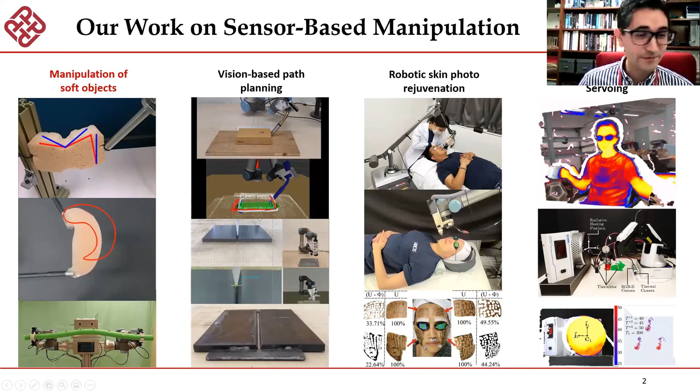The presentation I'm giving is mostly the work I've been doing with my group for the past 5 to 6 years. I mostly work on manipulation, sensor-based manipulation. For some reason, I'm only asked to talk about manipulation of soft objects. Probably in a few years I hope I can be asked to share my work in other areas. But in this talk, I will share the great majority of the work we have related to soft-object manipulation.

As I and all the others presenting today know, we all claim and make strong emphasis on the necessity to study this problem. More than the necessity, my intention with this slide is to ask: what is the difficulty? With about 50 speakers here, someone who hasn't worked on this problem before may wonder, is there any significant difference in manipulating something that is rigid versus something that is soft?

With rigid objects, we have basically many objects studied already. For soft objects, I was thinking this morning, is it fair to say that the great majority of objects we have in common environments are non-rigid? I don't know — probably worth discussion if someone wants to elaborate. But what they represent is the great majority of a capability we want robots to be able to autonomously perform: the manipulation of these materials.

The difference between manipulating these two, whether with a robotic hand or several manipulators, is that for a rigid object, its configuration, its feedback representation, is fixed. So let's go technical: we have at most 6 degrees of freedom — 3 of position, 3 of orientation.

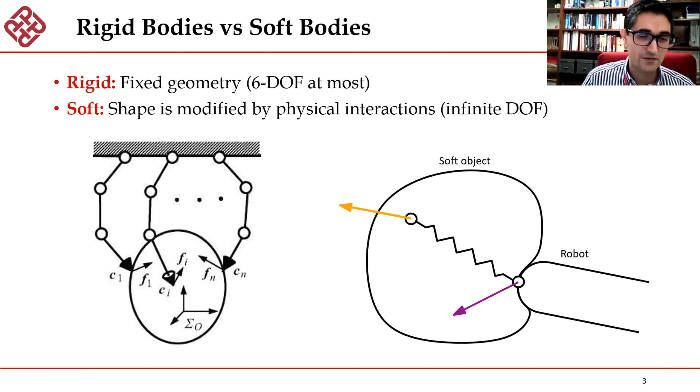Soft-object manipulation is the fashionable topic nowadays, isn't it? We have a new review every 6 months. We have special issues, we have workshops, probably in a few months a podcast about this topic. There's a lot of people working on this, and don't see this as criticism — I'm pointing this out to highlight the importance of this area, because providing manipulation of deformable objects capabilities to a machine really has many applications. I don't want to spend too much time motivating why this is important, because being here and giving a talk in a workshop should already make that necessity implicit.

So the work I'm showing today is about a problem that I call—I don't know if I can even say this has entered the state of the art—can we use the term shape servoing? I don't know, but at least that's the term I'm using.

In terms of areas, there's a field called visual servoing, where you have a camera and a manipulator, and you generally regulate some features to minimize an error.

Shape servoing is the natural extension to that problem. It's a control problem, but instead of controlling a feature like, say, a square observed with a camera, we're trying to characterize and deform the shape or configuration of a manipulated material.

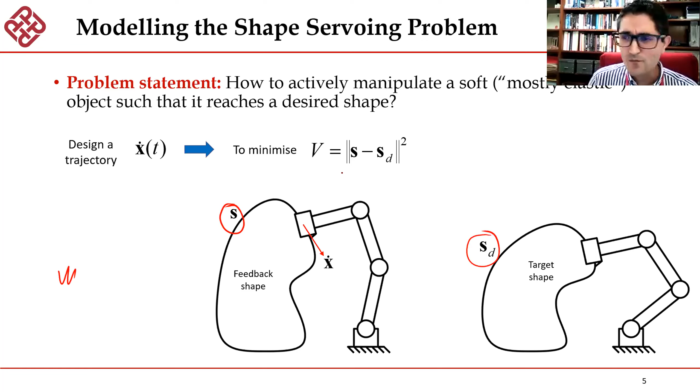There's a question here—let me move this one. Yeah, so this is the main topic I'm presenting today: how should we represent such a feedback configuration of the object?

As I mentioned, soft bodies, from a materials point of view, have infinite dimensional degrees of freedom. So when we model this manipulation problem as a control problem, we need to compute the feedback shape of an object. One of the questions we can start asking is how accurate or detailed such a representation needs to be. This is a crucial factor, because the level of detail determines the size or dimension of the representation.

There are many ways to do it. I don't think there's a unique way, and this is an actively studied problem in this field.

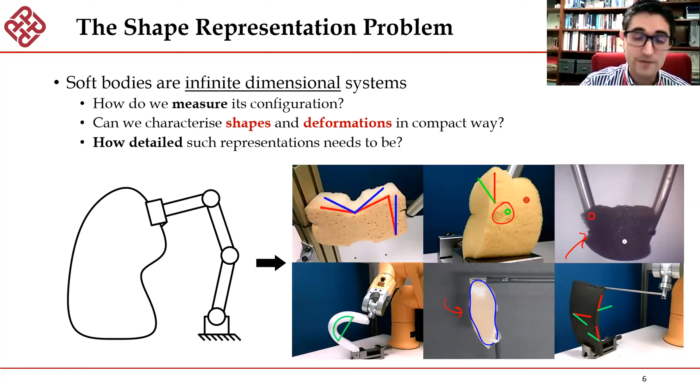These are screenshots from papers and experiments we've done through the years. We can represent shape with angles, as we'll show later in some experiments. We can represent them with simple points, such as this one. We can represent them with contours, or with points in 3D. Anyway, there are really many ways you can do it.

Now I want to draw attention to an important issue. From the experience we've acquired, there's an approach I call here the naive approach to shape servoing. Again, this is a control problem.

I want to emphasize that simulation—numerical simulation, virtual reality simulation, finite element model simulation—has objectives that are different, or generally different, from those of control. So we cannot equate simulation to control.

For example, we may be able to manipulate something in 3D to observe—let's say we're observing a foam sheet with a point cloud sensor. These are some typical shapes, surfaces we might compute. Let's assume this is what we want: we want the robot to deform this one into this one. So the question this talk tries to pose and partly solve is: how should we characterize the shape of this object so we can use it in a control scheme?

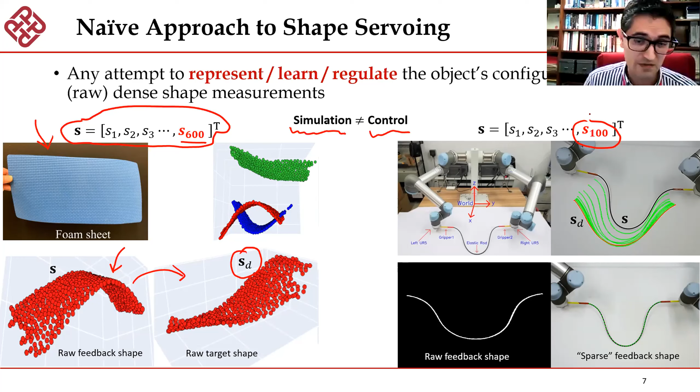So if we represent it as a series of steps, I'm deliberately using the word latent, because although in the field one may associate latent almost exclusively with a network, we can generalize this concept as a non-evident way to represent the configuration of a soft object. So I'm calling this a shape encoding algorithm or method that will extract a series of numbers that can fairly characterize, maybe even almost locally, quite globally, the configuration of this object.

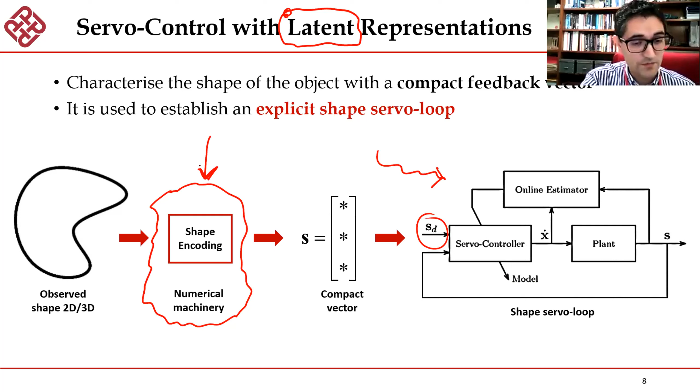So our interest in this talk is to find different ways to compute this, and how we use it in this very standard feedback control problem. We have some plant, we can feed the shape back, and we can define some target. So we'll give you some examples of the work we've been doing specifically on this.

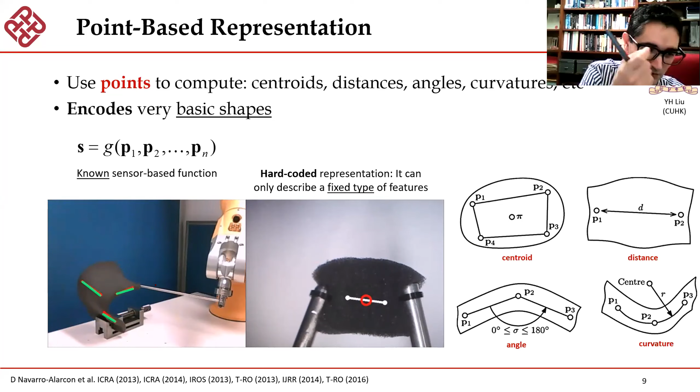Okay, so what I'd call the trivial solution is if we can use some specific geometric features to compute centroids, angles, distances, curvatures, and their combinations. So any geometric function based on some point features you may detect on the surface of your object. We can use such functions, say a centroid or an angle, to characterize the observable configuration of this object.

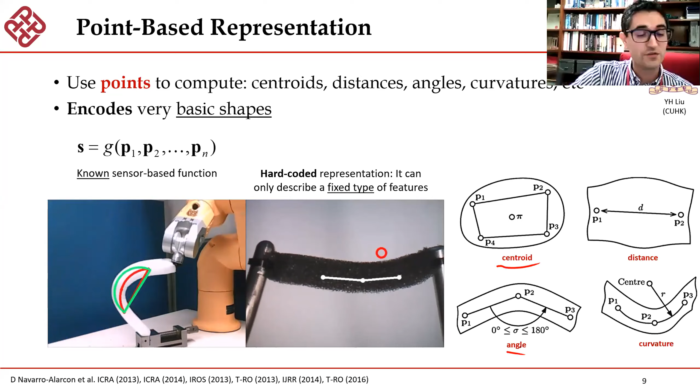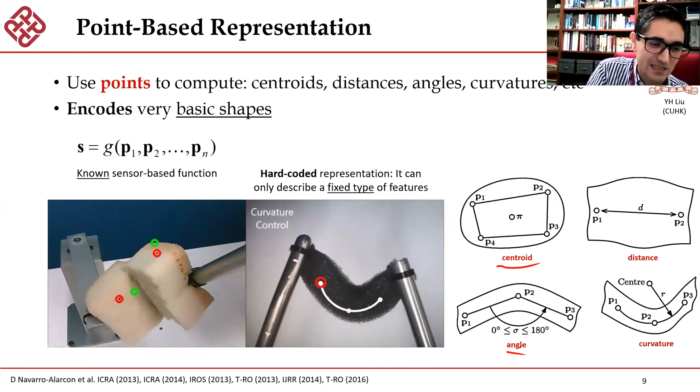We did this in probably too many papers. I'd call it the very trivial approach, because it's the direct extension of what one from the visual servoing community would do. It's really the natural way you end up doing it, because it's the easiest way to do it and closely resembles the visual servoing problem.

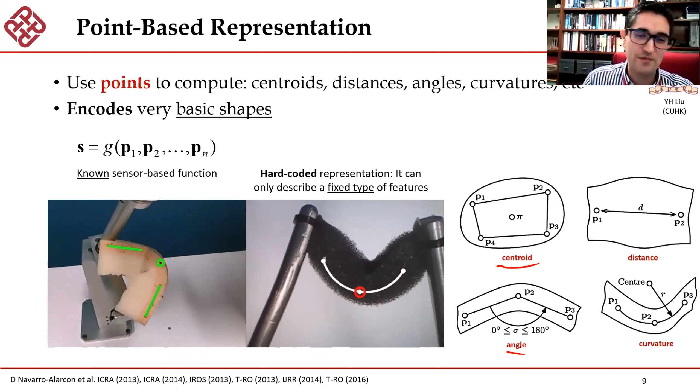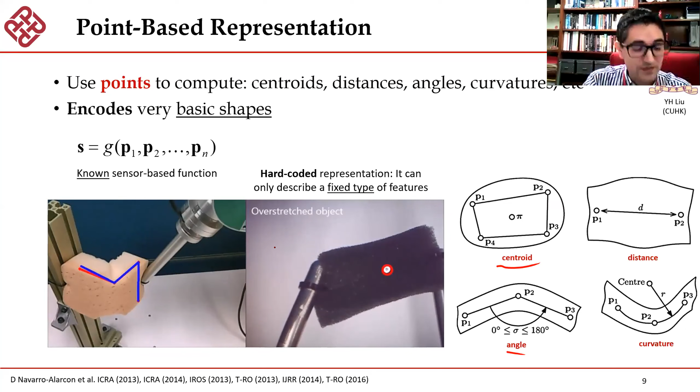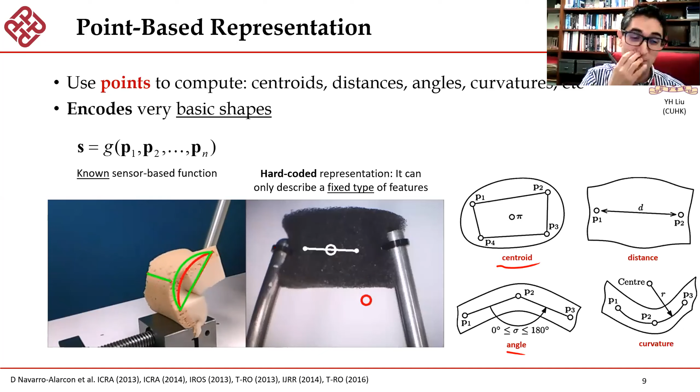But it has some issues. The type of shapes or configurations you can encode using hard-coded geometric features are very basic, very limited. And once you define it as such, you cannot morph them into something else. Once you've coded curvatures and want to do something else, that's it - your function cannot change. And that brings several limitations to the problem.

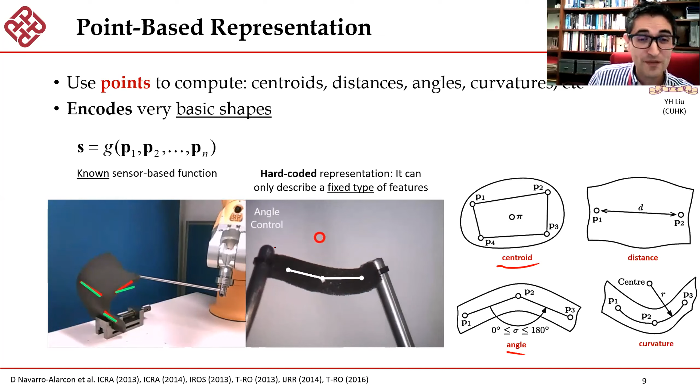So we can, of course, define more general approaches that are not as specific to some geometry. Let's say, for example, bending - that's very clear practically: once you've coded bending, you can't really do stretching somehow. So we started studying more general approaches to represent, in this case, contours.

So we use, again, a very standard way to do it - we use Fourier series, a finite number Fourier series, to approximate the observable contour of an object. The reason we did this is, from a control background, we can then use very well-known tricks that we use everywhere. We can split such approximation based on a known regression matrix that you can measure based on sensor feedback, and then you have a vector, which are the so-called Fourier coefficients.

It turns out these coefficients - that's our proposition here - we use as, let's call it, a proxy to shape. It's not shape per se, but they can encode a shape you're observing with your camera with a locally unique set of vectors. I highlight this has to do with using finite Fourier series, because we know from theory that infinite Fourier series will exactly approximate everything, but will give you a gigantic vector of coefficients.

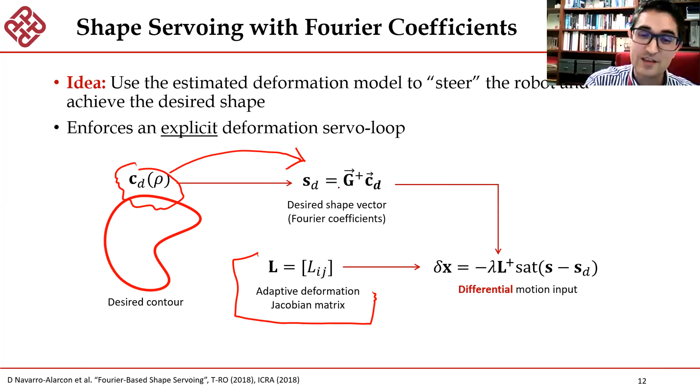First of all, you have a contour, a desired contour, you project it into Fourier coefficients, desired Fourier coefficients, and then you project this differential, which is actually a differential in shape space, into robot motions. That's what we generally do with sensor-based control.

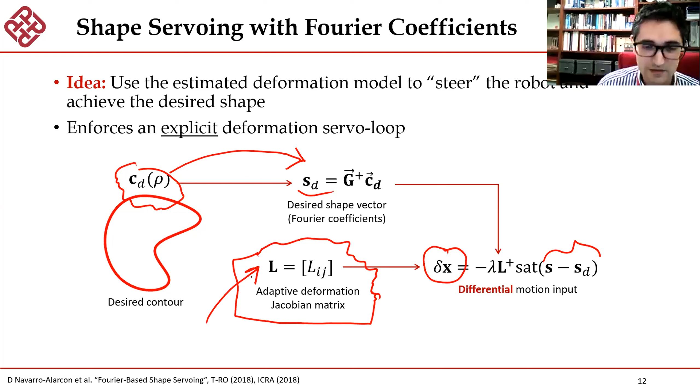Key here, as someone may wonder, is how do you compute the Jacobian matrix? There are so many recipes, and I literally call it that, recipe, because you just use it to estimate a Jacobian matrix. So let's see some results.

Here we're using 2D motions, and the sensor also gives us 2D shapes. What we are doing is encoding a high-dimensional observable shape from an object with just a few parameters, in this case depending on the number of harmonics.

I don't remember, I think in this experiment I used 3 to 4 harmonics, less than 20 parameters, so it's not so detailed.

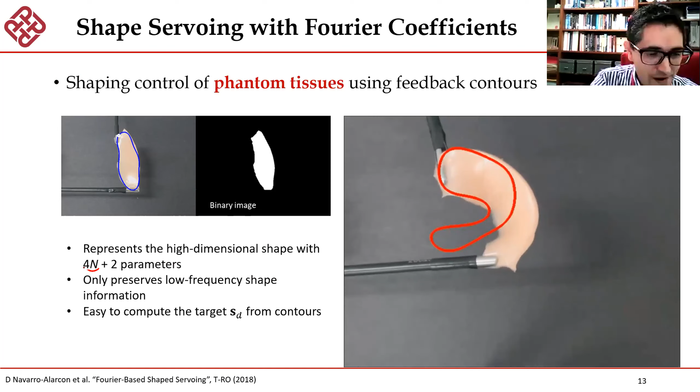As you can see, what we do is remove all the high frequency information, all the little details, which even if you have them, that's a question, does it help from a control point of view? What would you do?

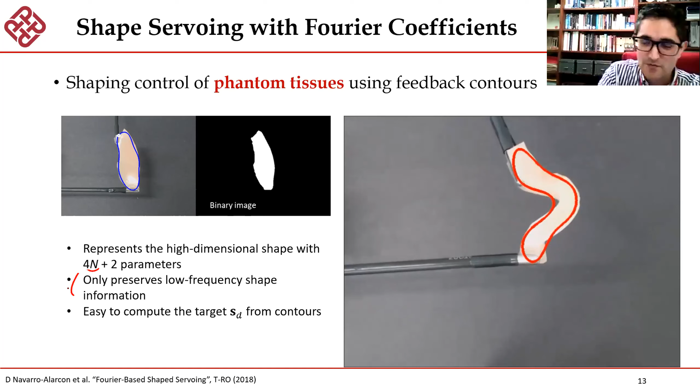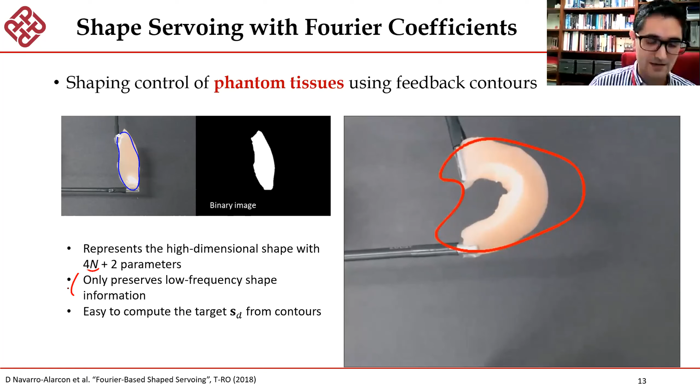If you hadn't really reached that specific detail, can you still control it with a limited number of grasping points? Not really. So that's one of the reasons I use for not relying on dense measurement of the object shape.

We naturally extended this idea, since there are many analytical formulations of curves. From the graphics field, we have what we call NURBS and Bezier curves.

So we use these other representations, and we literally follow the same set of steps that I presented before: observing a contour, characterizing it in terms of its arc length, and then using least squares estimation to obtain, not Fourier coefficients, but different coefficients.

In this case, we don't need that much information. Let me try to remember how many. Same case, I don't think we use more than 20 numbers to characterize these curves.

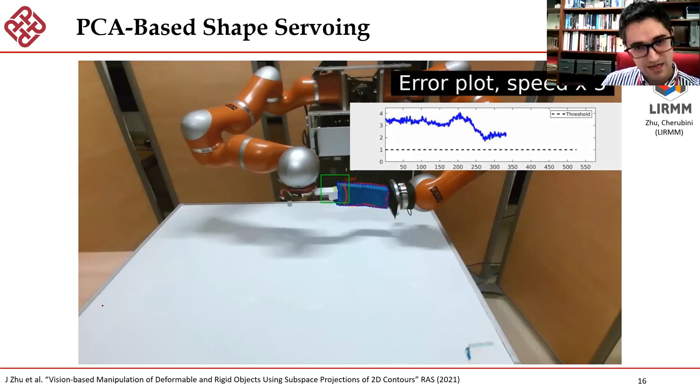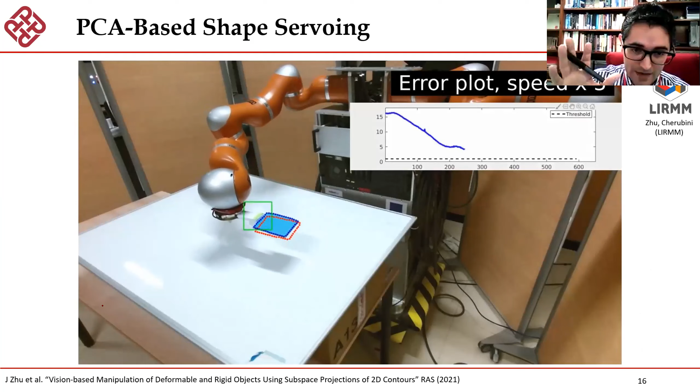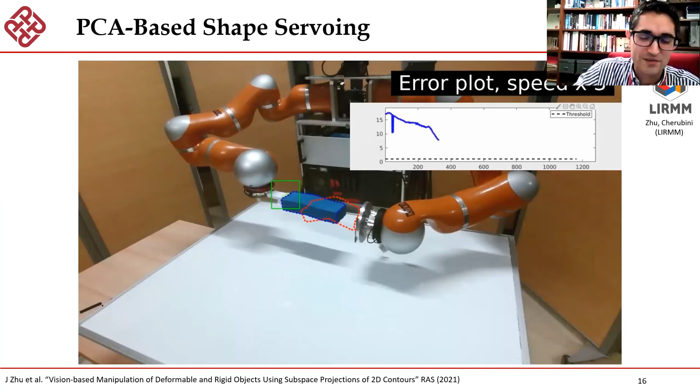One important aspect here is that with exactly the same method, from the method's point of view, the representation, it doesn't really matter if it's a rigid object, a soft object, or a mixed properties object. We're just characterizing its configuration. So we use it to do deformable shape control, translations, translation plus deformations, and so on. We have more details in this just recently published paper.

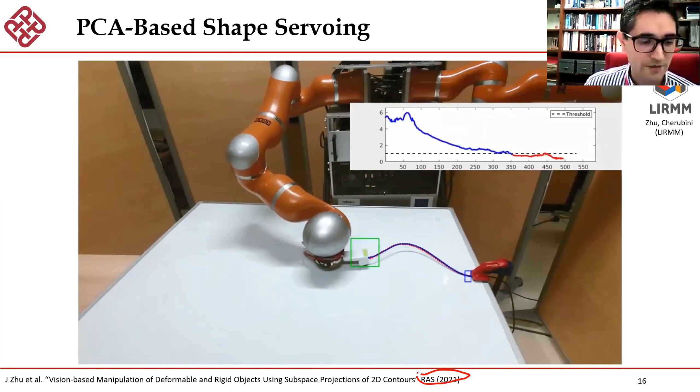And also if someone says, well, these guys use PCA, why don't we use the autoencoder? It's also very similar, related. So how would we use an autoencoder for doing a representation of this?

Exactly as the autoencoder works, we will have a set of contours that we use to train this autoencoding network, and we will use in this case the bottleneck layer as the shape coordinates, as the latent variables, the quasi-feedback variables that we will use for control. In contrast with PCA, the autoencoder doesn't necessarily provide you orthogonal latent coordinates. It will just give you some numbers.

And you may also have, in its standard form, the question of how many coordinates do you actually need to represent it well. We don't really, at least in here, address that problem. We use PCA as a guide to select the number of codes.

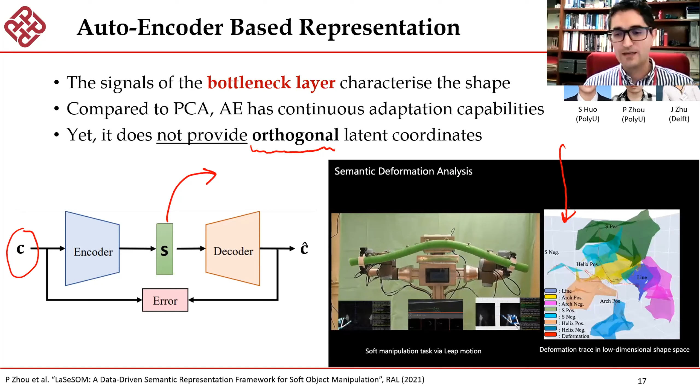What should we be looking at here? Also interesting, we can obtain some semantic information. So if we visualize this in the reduced space, this is for 3D, of the 3D contour, we can find some information as to what kind of shape the object has, and what we are sensing. For example, we can have a helix, a positive arch, negative arch, and so on. This information might be given by PCA if we run it in parallel.

Which also leads us to the issue that for this work we have actually just been simply designing controllers where we want to drive the feedback to a desired location. With a student of mine, Peng, we recently started developing a method where we model that these latent variables, for example from an autoencoder, or literally any of the other representations, not necessarily restricted to that specific neural network architecture, Fourier or others, might produce the same effect: that locally small changes in the robot pose will produce small changes in the shape. So locally, this will resemble a Euclidean space.

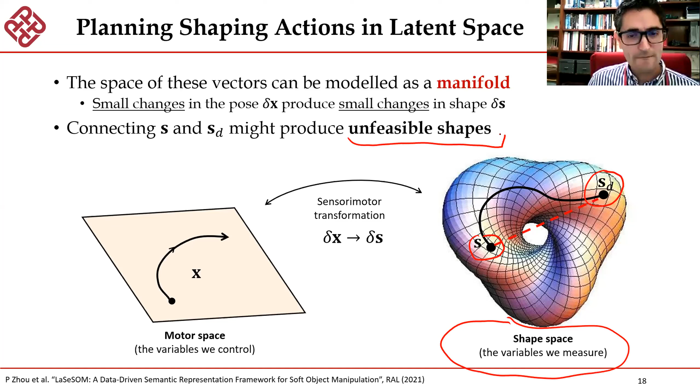But if you see it globally, some trajectory might not be a connected one in the shape space, as for example here we are describing. So what we did is we constructed such a manifold and then started designing trajectories, which are like geodesic trajectories over such a manifold, in order to avoid what could potentially be unfeasible shapes. In this paper, we also found that by simply doing linear interpolation in this space, we might find some sequence of shapes that are not really connected or physically achievable from one state into the other. Whereas if we work on computing the geodesic path, we can find a smoother set of shapes. So this is a nice, interesting planning shape problem that we have been recently working on and just recently released in RA-L.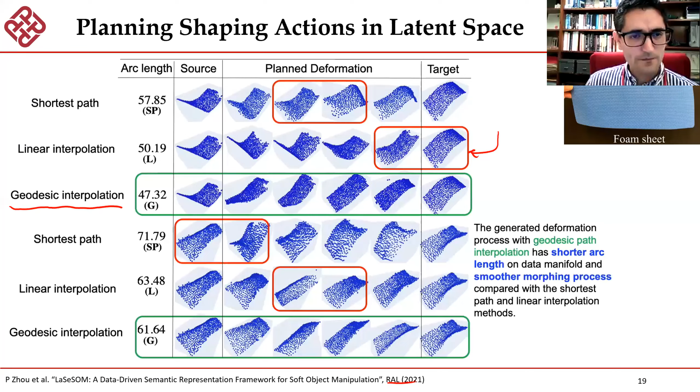What else do we have? Okay, yeah, this is also all very recent work. So I told you all about this talk, it is about different ways to represent shape and use it for control. The task remains the same. Yet another way to represent it is by using contour moments.

So this is another work that we have been doing with my student from HIT. So what do we do here? We have three main parts of this descriptor.

We use standard contour moments, which we know are invariant to translations and rotations. With this first part, we have 7 numbers that describe in an invariant way the shape of any object, regardless of whether it's deformable or not.

We use central moments, like the centroid, to describe the position and translation of this object. And we use the orientation of the principal axis to describe the rotation on the plane.

So here we can see, for many collected shapes in simulation, how these descriptors vary in their respective space. We normalize all of these because they all have different units. Here are some experiments showing the same with different types of objects: cables, some spongy, and I believe even a rigid object.

In this paper, what we're working on is a control paper, very much a control paper. We are comparing different types of controllers. The one we're proposing is finite time sliding mode control. The other ones still work quite well too, but with a control method you need to highlight some issues. In this case, it's exact minimization of the error.

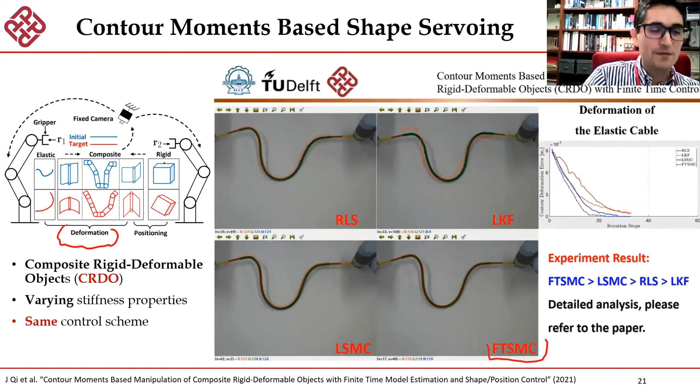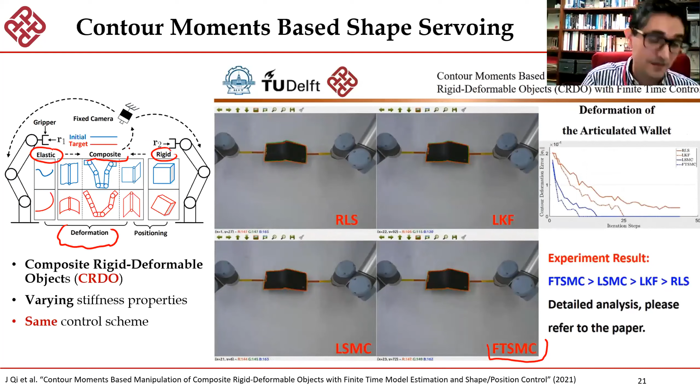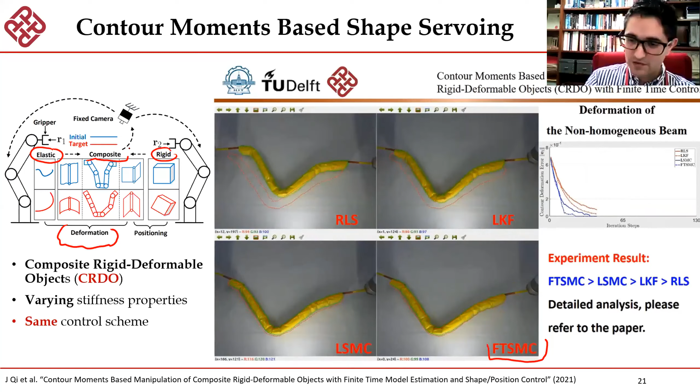The interesting thing we're addressing in this paper is that the same shape descriptor and control method can be used not only for soft objects, but to consider more of a spectrum, entirely going from purely elastic to rigid, which we address and call composite. So we're proposing a method for deforming or positioning composite rigid-deformable objects with the same method, and these objects might have different types of properties.

More from a practical aspect, this is the latest work of my student here at PolyU. We're working towards optimal packing of precisely what we mentioned before, which might be soft objects, rigid objects, or composite rigid-deformable objects. Our idea is to design an optimal algorithm that can decide the type of box needed.

For optimally packing a series of objects, we're working on an action planner. At present we're mostly working with soft and deformable materials, but the idea is, for example, to completely transfer all these objects into a smaller box and decide a specific location for them.

So in this case, we've been working from the action planning point of view. We are designing a series of grasping, re-grasping, and jointly deforming an object such that it fits the expected shape within a confined workspace, in this case, the box.

I'm not taking more time, but this is the last one. So, conclusions for my talk. I have modeled, as I do with this line of work, soft object manipulation as a control problem, specifically as a servoing problem, where we can have some form of output representing shape, then feed it back and have an explicit shape error.

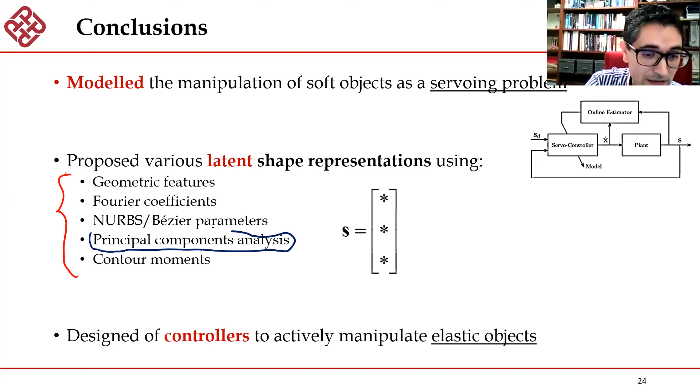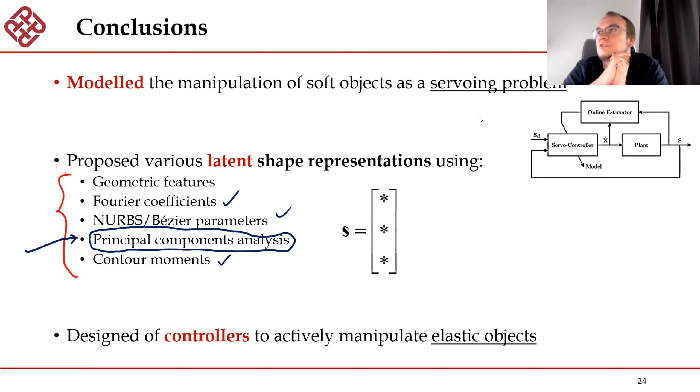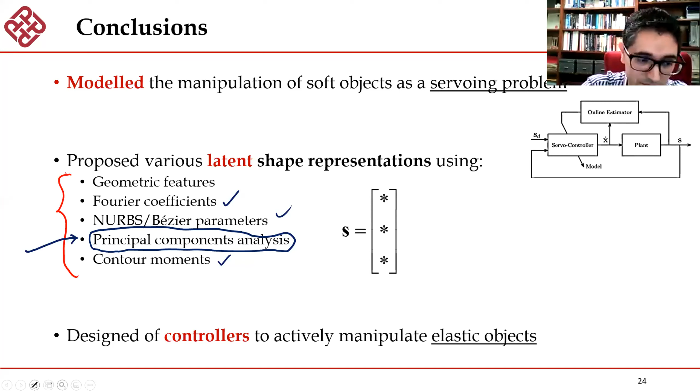Okay, thanks, I think we have time for one more. Anonymous wants to know how you found the desired contours in the first place for the shape servoing. Well, the truth in the experiments... well, I mean, how do we find it? You can actually draw it yourself. I mean, it can be literally any contour. You can, I don't know, it can be the angry bird that I just drew. You can have anything, and from here you just extract that vector of parameters.

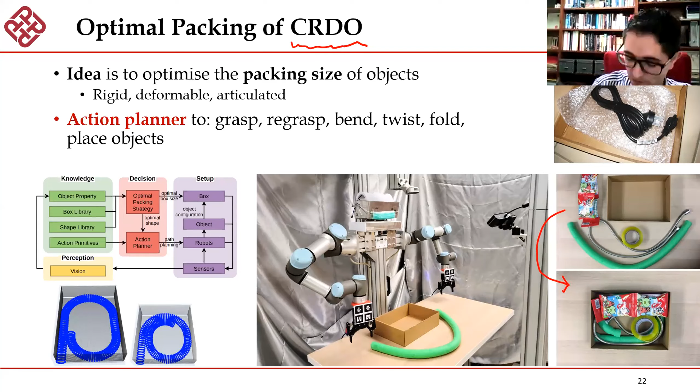In the experiments, in order to know whether it's a nearby feasible contour, what we did is we deformed the object towards some region. We collected, say, that observation of shape features, moved elsewhere, and then tried to go back there. That was the experimental approach, but that doesn't mean the method is limited to that. That was just for simplicity for the person doing the experiments. You can draw anything, and an algorithm should be able to extract the numbers that represent that.

Thanks, and I think we have just one more question, so I'm going to also ask it. Faye asks that it's kind of a sensible approach for 2D contour representations, but what's the case in 3D? It happens that different 3D shapes can project into the same contour in the image frame. What will happen in this case, and how to handle this?

Yeah, no, yes, it's a valid question actually. But, well, I mean look at this slide. You can have, say, let's say if I go with my favorite PCA, you may compute your PCA for... I always have it with me in case somebody asks... of a 3D object like this, no problem. Given that you have the necessary observations to know the shape and the configuration that you have.

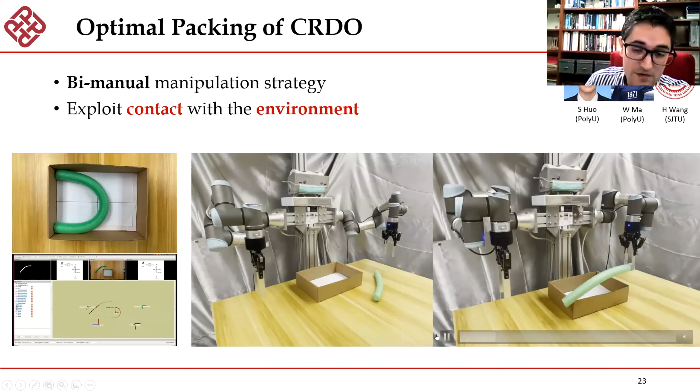Say, for example, where was it? In this one, actually we don't see it very clear here, but my student, she's actually computing the backbone of this object. It mostly moves in the plane, but that's by design. We can also move it in 3D, and we should be able to observe it. So, no, it's actually not restricted to 2D. Experiments and many things, we've done it in 2D, but analytically there's no reason why it shouldn't be feasible.

And actually, well, some of the results we saw, I didn't emphasize this, some of those are actually 3D. We did show something with geometric features. We do have something with Bezier. Also, these contour moments we have done in 3D. So it's feasible, yeah, and has been done.